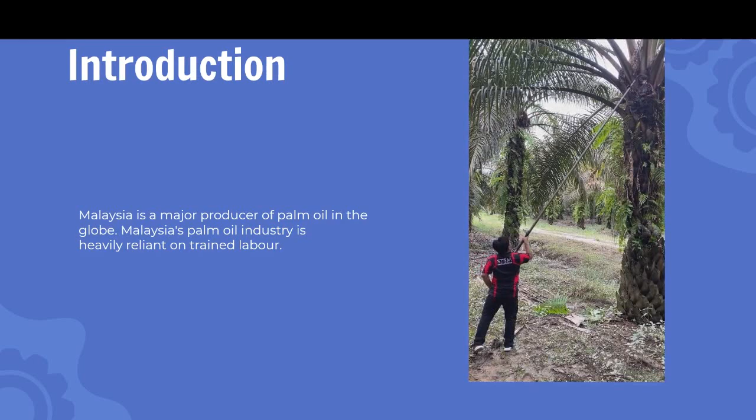Malaysia is a major producer of palm oil globally, and Malaysia's palm oil industry is heavily reliant on trained labor. As a result, Ladang KPS planned to alter the harvesting process, and they hired our company to develop a system that leverages current technology to help with the palm oil harvesting process.

Our problem statement was to propose a new design of harvesting tool to make the palm oil harvesting process more efficient at the Stenggang oil palm estate.

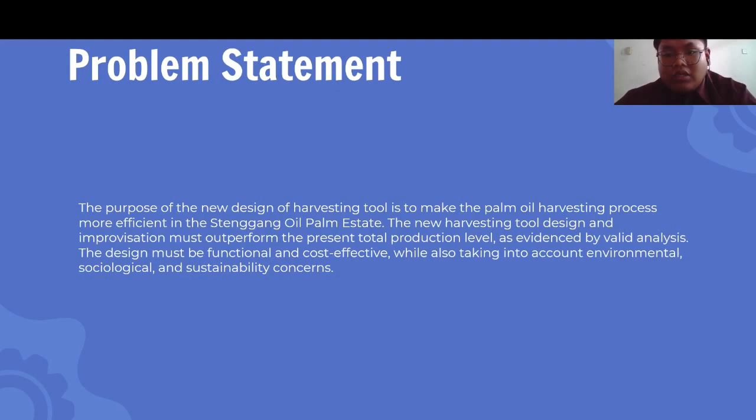In the new harvesting tool design, any improvisation must outperform the present total production level, as evidenced by valid analysis, and the design must be functional and cost effective while also taking into account environmental, sociological, and sustainability concerns.

The objectives to achieve were to study the design concept in improvising the harvesting tool, to design a new high productive tool for the palm oil harvesting process, to analyze the new harvesting tool, and lastly to determine the proper and suitable value for our product.

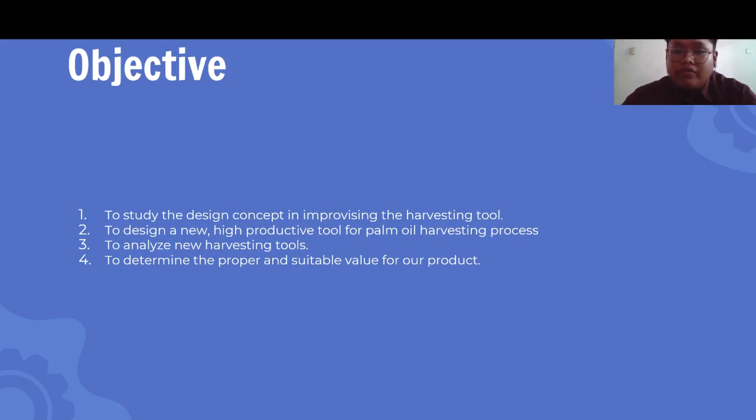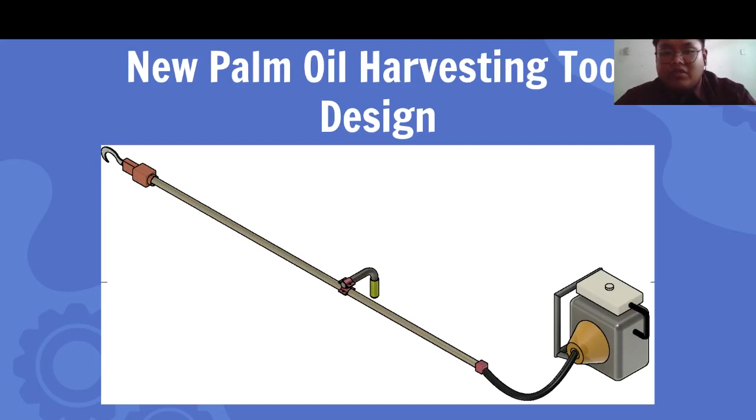After going through several conceptual designs such as house of quality and pugh chart, this is our final design, where the harvesting machine will increase the harvesting rate since the process becomes easier due to the amount of force needed to harvest the palm oil being reduced.

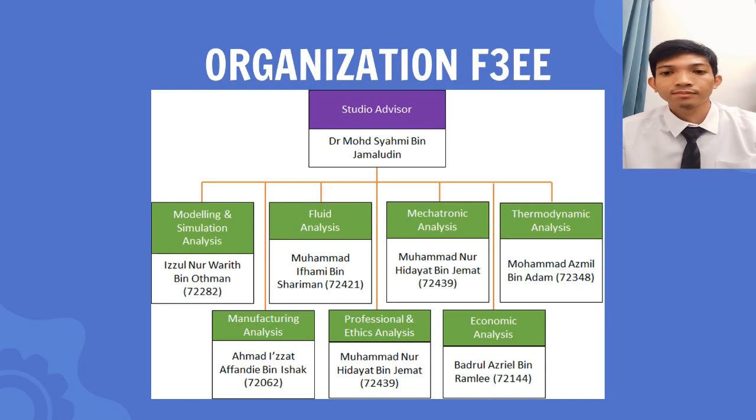I will be presenting about the components of the machine. Firstly, the engine support frame, or the backpack, will support the engine to be carried at the back. Then there is a two-stroke petrol engine which will provide power to rotate the shaft.

Next is the flexible shaft that is connected to the engine; it will transfer power from the engine into the shaft inside the pole. Then there's a flexible shaft-to-pole connector which connects the flexible shaft to the pole, and next is the shaft itself inside the pole that transfers the power to the cutter.

The pole contains and protects the shaft from the environment. Next is the handle joint, which connects the support handle to the pole. Then there is a gearbox and a sickle: the gearbox contains and supports the gearbox mechanism, while the sickle is used to cut the fresh fruit bunch.

There is also a gearbox mechanism that changes the rotational motion into linear motion for the sickle to move linearly. Lastly, there is a support handle that provides the user with extra support for the pole.

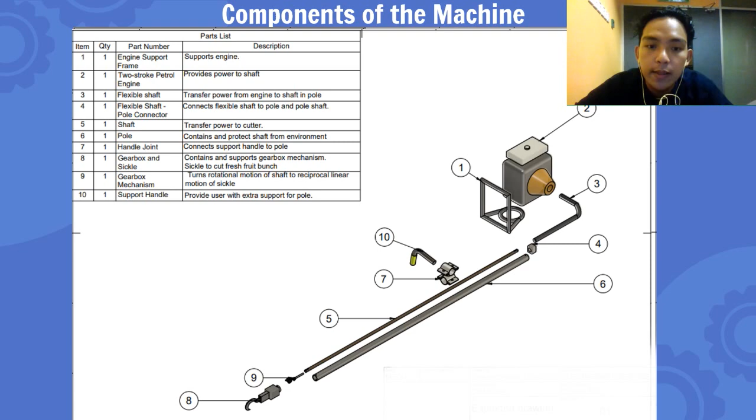Next is the gear mechanism inside the gearbox. As you know, the sickle moves with a 10 mm linear motion to cut the fresh fruit bunch, so the rotational motion of the shaft needs to be converted into linear motion.

The shaft is connected inside the gear train to a bevel gear, which is also connected to a Scotch yoke mechanism. That way, the rotational motion can be converted into linear motion, so the sickle will move linearly.

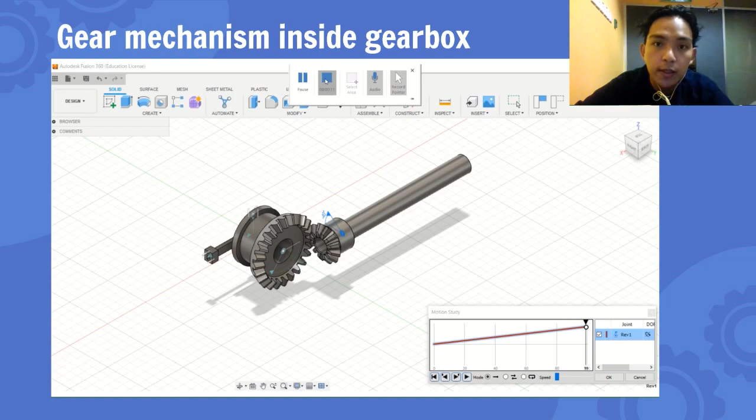Next will be the mechatronic components of our machine. We will be using a fuel level sensor system to indicate to the user how much fuel is left for the engine. This is because the fuel tank is located on the engine, which is at the back of the user during operation. Thus, it is difficult for the user to see the fuel level in the tank since it is out of their sight.

The implementation of this system will help solve this problem, so the user knows how much fuel is left in the tank before it runs out.

The suitable sensor for this system will be a resistive-based sensor. This sensor is small and can be placed in the tank of our engine; it is used to measure the fuel level inside the fuel tank.

The next component will be the fuel digital fuel gauge. This is used to indicate the fuel level measurement from the sensor to the user.

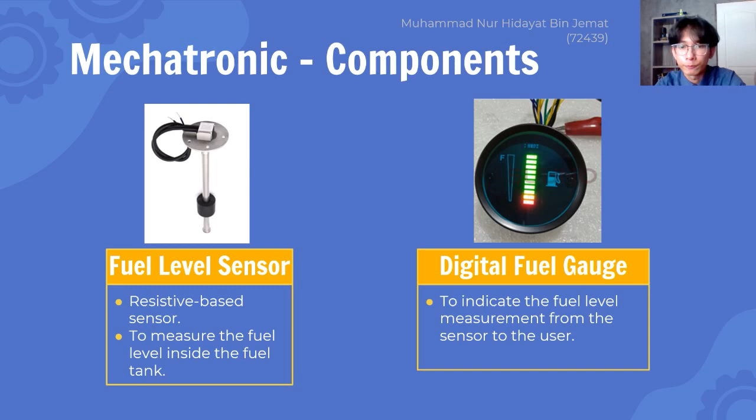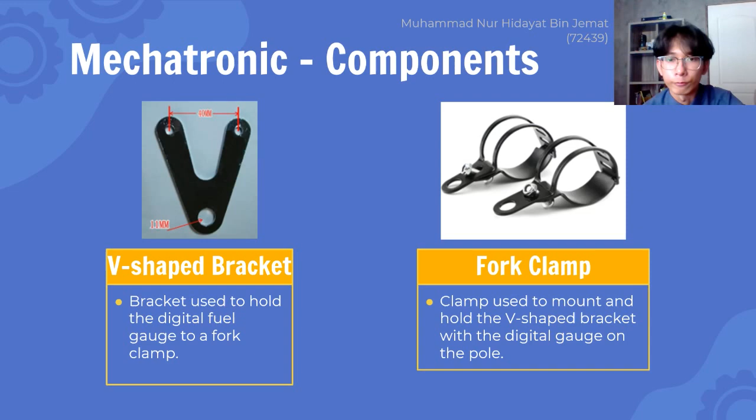Next are the components we will use to connect the digital gauge onto the pole. A V-shaped bracket is used to hold the digital fuel gauge to a fork clamp, and this fork clamp will be used to mount and hold the V-shaped bracket with the digital gauge on the pole.

This is the simulation part, used for us to understand how our fuel level system works. A software will be used to demonstrate the working principle of this system, which is the Tinkercad online software.

This system consists of two units: the sending unit and the gauge. The sending unit is the resistive fuel level sensor, while the gauge is the digital fuel gauge. This fuel sensor acts like a potentiometer, and the float moves with respect to the fuel level. As the float moves, the resistance of this fuel sensor changes.

For the working principle, when the fuel level in the tank decreases, the float of the fuel sensor, which is connected to the metal rod, will move downward. As shown in this figure, a potentiometer is connected to the float and attached at the end of the metal rod. When the float moves upward, the resistance of the potentiometer will decrease and the voltage will increase, lighting up the LEDs inside the digital gauge.

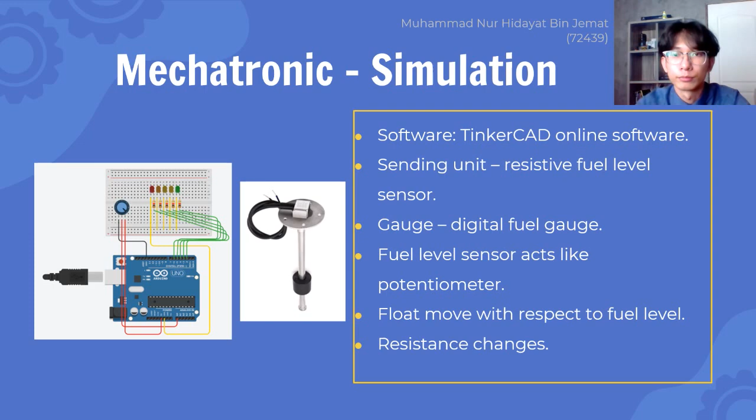Here is the simulation circuit for our fuel level system. In this circuit, an Arduino Uno R3 is used as the microcontroller. A potentiometer in the circuit is used to measure the fuel level in the tank, and LEDs with different colors are used to indicate the fuel level.

The red LED indicates that the fuel is almost empty. The yellow LED indicates that the fuel is half full, while the green LED indicates that the fuel is full in the tank.

So in this simulation, as I rotate this potentiometer anti-clockwise, the resistance decreases and the voltage increases. This increasing voltage lights up all the LEDs, indicating that the fuel level is full. It works vice versa as I rotate the potentiometer in a clockwise direction.

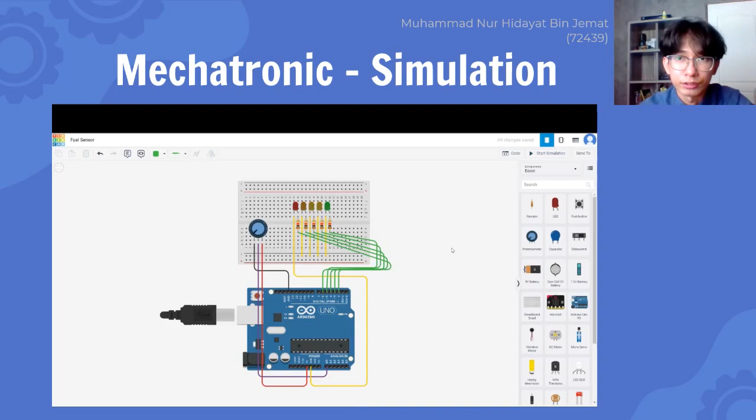The engine we will use for our machine is a two-cycle single-cylinder forced air-cooled gasoline engine, model SM33 Sumo brush cutter. The capacity for this engine is 30.5 cc, while the output is 0.81 kilowatt or 6,500 rpm. The ignition plug used for this engine is BM6A.

The capacity for this tank is 1.4 liter, and the weight for this engine is 3.8 kg. The reason we chose this engine is because it is light compared to other engines we found on the internet.

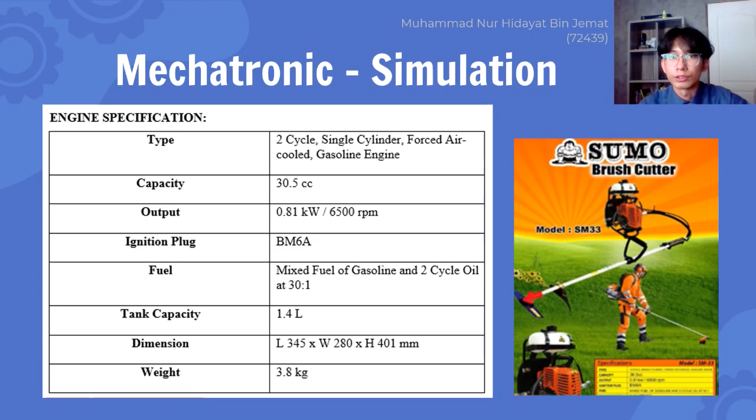The next part is the production rate of the product. Our company's annual production is 960 units of the harvesting tool produced per year. The production rate can be classified as a medium production quantity, as it is less than 10,000 and more than 100 units per year. The working duration is 9 hours per day and 5 days per week.

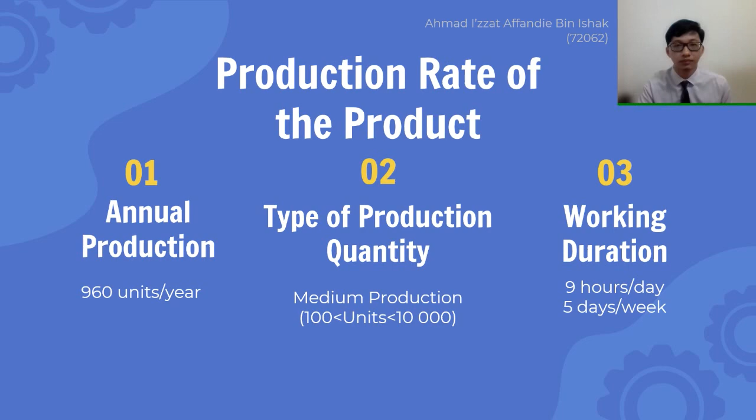Next are the components and parts used in our product. The handle joint is the only component of the harvesting tool that is actually fabricated by us, through the sand casting manufacturing process, made from aluminum alloy T6 6061. Our company does not fabricate the other components, since doing so would be expensive and costly. Instead, all other components and parts are outsourced, meaning they are purchased from third-party vendors.

The parts that we outsource are the sickle and gearbox, pole, shaft, sensors, engine and flexible shaft, adapter, and bolts and nuts.

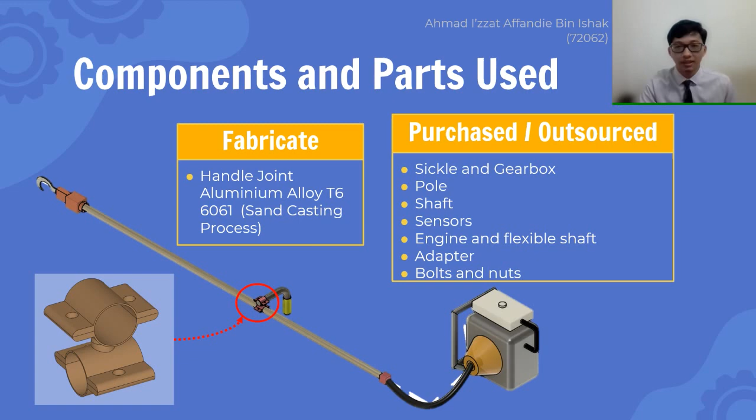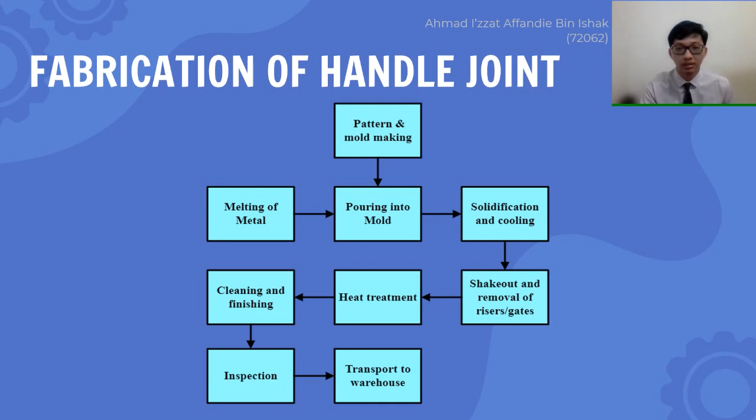Now the fabrication of the handle joint. This figure shows the flow of the fabrication process. First, in the initial phase of casting the handle joint, the metal of the handle joint, which is aluminum alloy T6 6061, is melted in the furnace.

Next, an imprint is formed by laying the design in the sand and pressing it to create the shape of the component that will be cast. The design is then removed, and the cavity of the mold is filled with the molten metal.

The metal is then allowed to cool until it becomes solid. Then the casting is extracted from the sand mold, which is broken away from it. After that, a heat treatment process is done to strengthen the material, followed by cleaning and finishing. Before the handle joint is transferred to the storage facility, it is inspected to determine its quality or any possible defects that may occur.

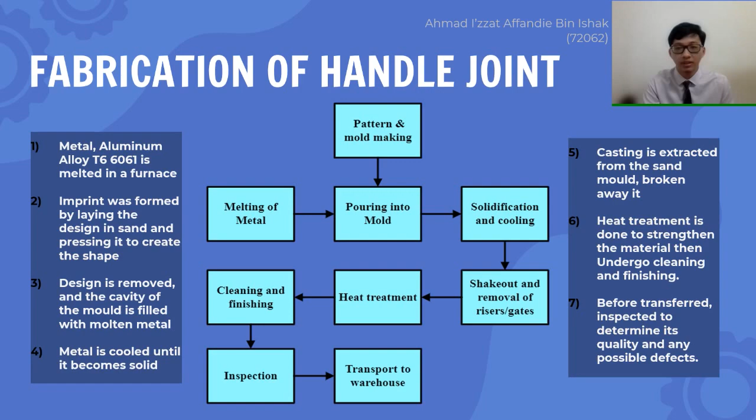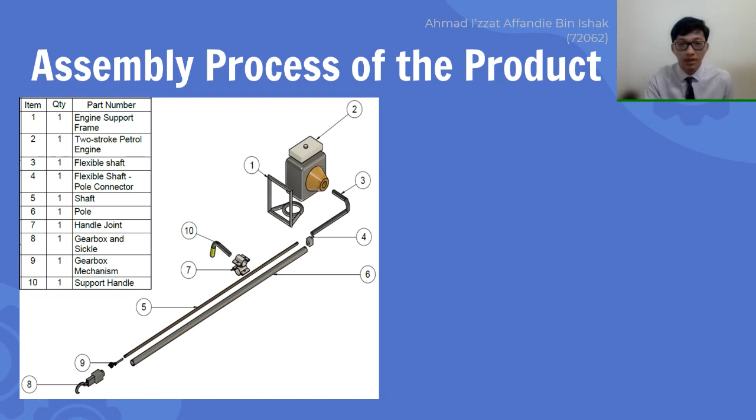Process of the product: there are three main parts that need to be assembled before fully completing the final product. The first part is from the bottom, consisting of the engine, frame, flexible shaft, and pole connector.

The second part is at the middle, consisting of shaft, pole, handle joint, and support handle. The last part is at the top, consisting of the gearbox and sickle.

After completely assembling these three parts, the user can assemble all the parts together before it can be used.

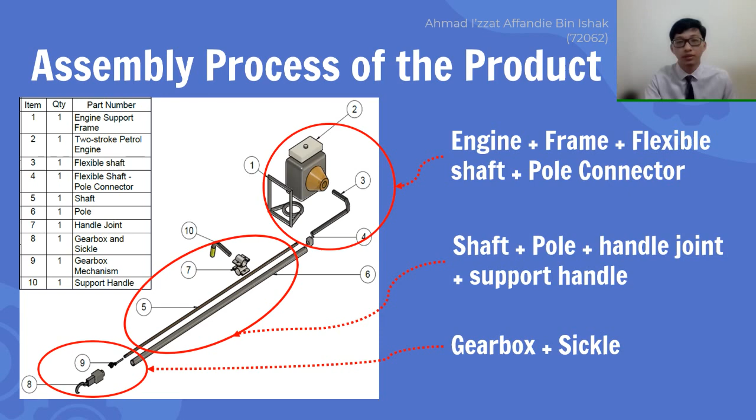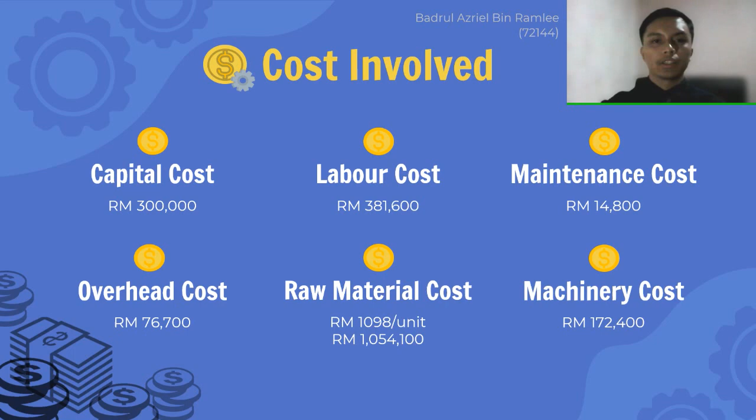As for our initial investment for the project, the total investment required to initiate the project is around 2 million. This investment considers the capital cost, labor cost, operating cost, and raw material cost.

From the calculation of unit selling price, considering the 10% SST rate and 40% profit from sales, the selling price for our machine was 2,426 ringgit, significantly cheaper than the Cantas Evo price mentioned in a journal by MPOB, which costs around 3,800 ringgit.

This unit selling price is also slightly cheaper than some existing Cantas Evo products in the market, which range from 2,600 to 3,400 ringgit.

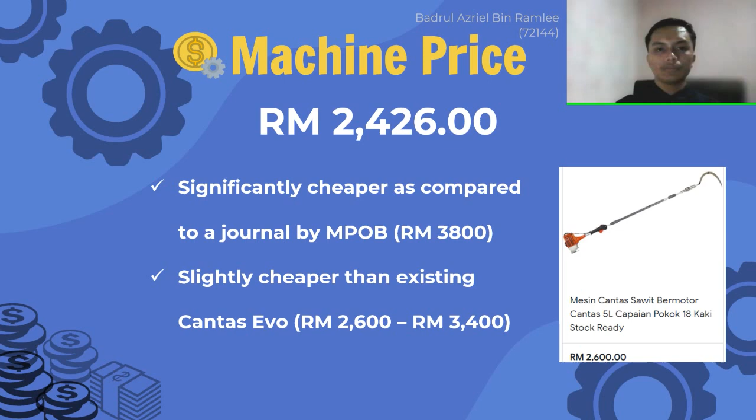Last but not least, the benefit cost ratio calculated from the cost analysis was 1.54, which shows that the project will bring benefits instead of losses.

Apart from that, the yearly sales of the machine will also help us regain the investment at about 41% annually. This means we will gain back the full amount of our investment in only 3 years.

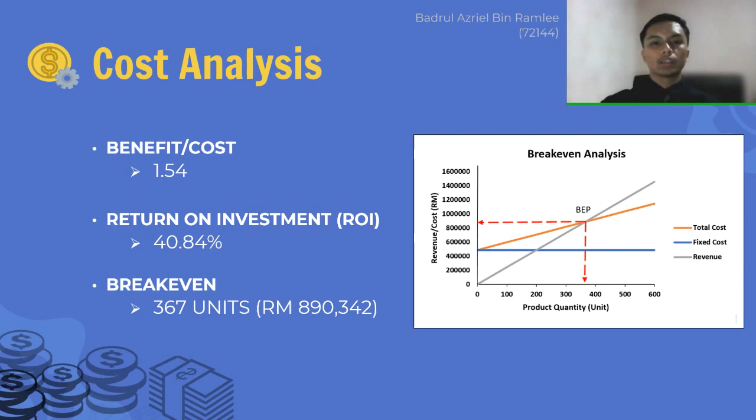Finally, to conclude the costing part, our project will assist in achieving the Sustainable Development Goals. The targeted SDG goals from our project are SDG 8, 12, and 13, which promote sustainable economic growth, sustainable consumption and production, and help combat climate change.

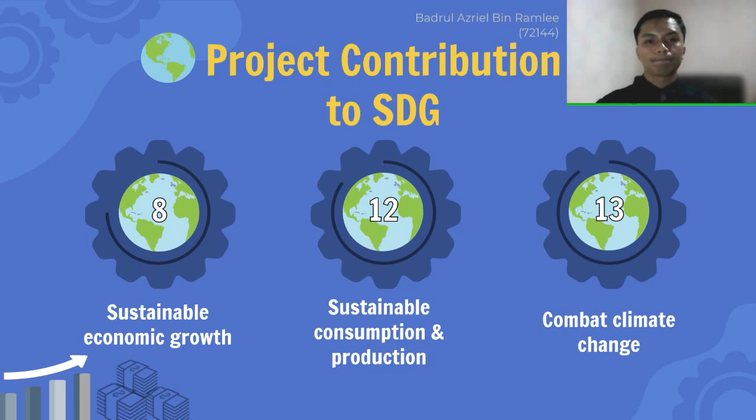Next part will be professional and ethics. For our machine, during operation, it will produce vibration and noise.

These vibrations are produced by the engine, which can be transmitted from the machine to the hand of the user. It can cause discomfort and decrease the efficiency of the harvesting process. When the level is higher, it can lead to serious problems such as disease.

Thus, we have decided to follow a standard such as the international standard ISO 5349. According to this standard, the vibration exposure level should be lower than 2.5 meter per second square. If the level is higher than this, changes need to be made to modify the vibration so that it is lower than this value.

To measure the vibration, an accelerometer can be used by measuring the vibration at the holding points on the pole.

This vibration can be reduced by using an isolator. As for the noise, exposure during work can lead to hearing damage, especially if exposed for a long period of time.

This is the standard that we will use for noise exposure, set by the Occupational Safety and Health Noise Exposure Regulations 2019.

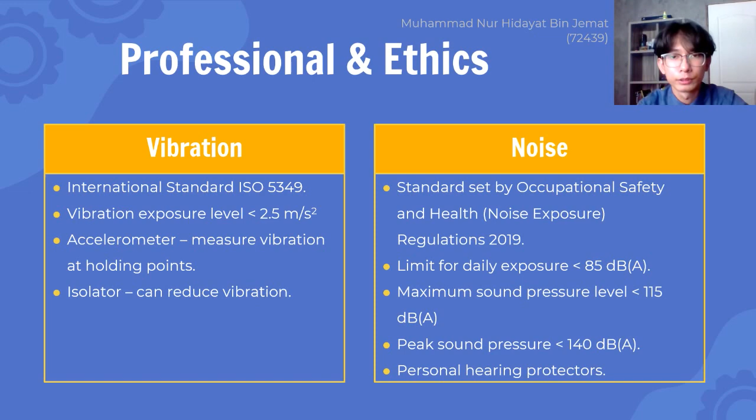For conclusion, from our discussion, we were able to produce a prototype for the palm oil harvesting model by using material that have been refined with the original shape of the model.

We were also able to solve the mechanism and animation part for the movement of our design product by using design software.